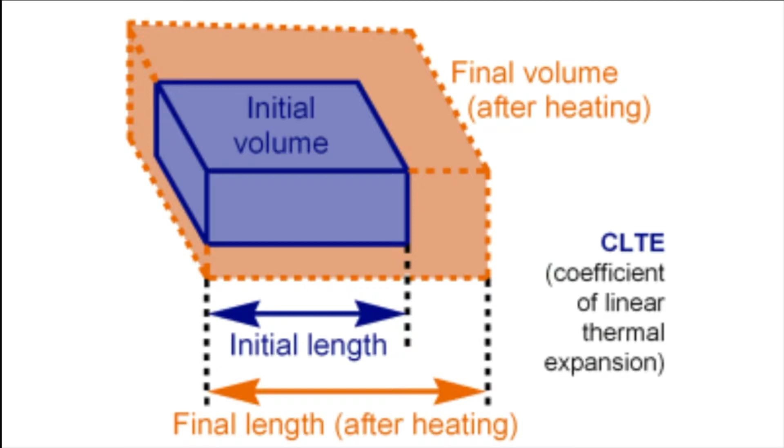When metal's temperature changes, the volume of the metal will change proportionally due to thermal expansion. In designs for the Hyperloop, it is stated that the tube will be made out of steel. Using the equation change in length over initial length equals the expansion coefficient multiplied by the change in temperature, I can calculate the amount the tube will expand. With algebra, I can manipulate the equation to be this. The expansion coefficient for steel is 13.7 times 10 to the negative sixth.

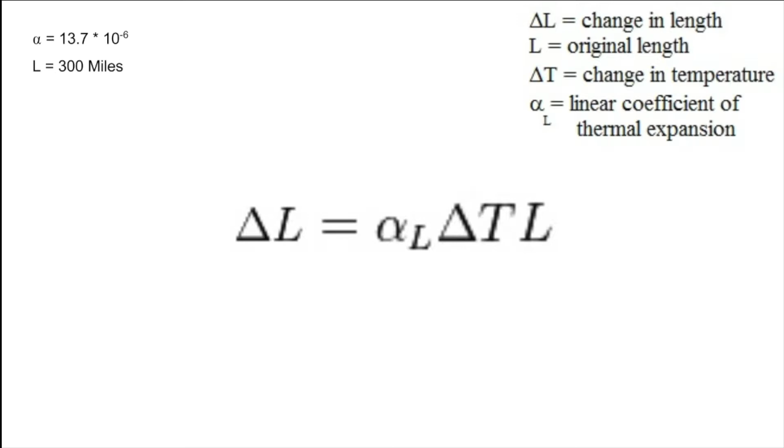300 miles will be used for the length, as that is the approximate distance between San Francisco and Los Angeles, and the change of 10 degrees Celsius will be used. With these numbers, the length expanded is 0.041 miles, or 216 feet. It is stated that the Hyperloop will have frequent expansion joints to counteract this. However, this brings up the question of how.

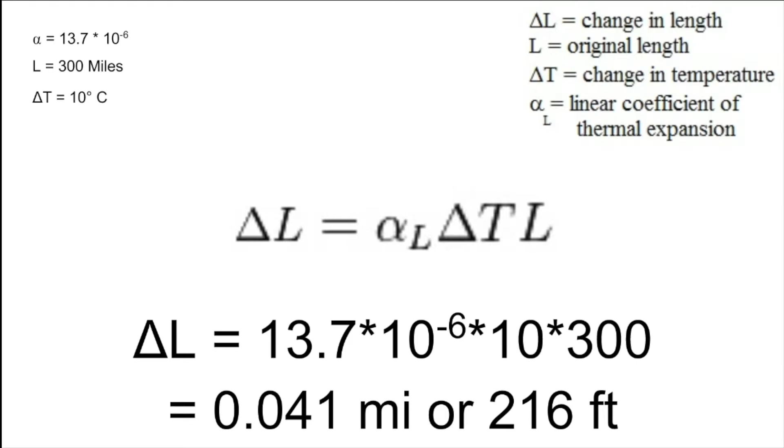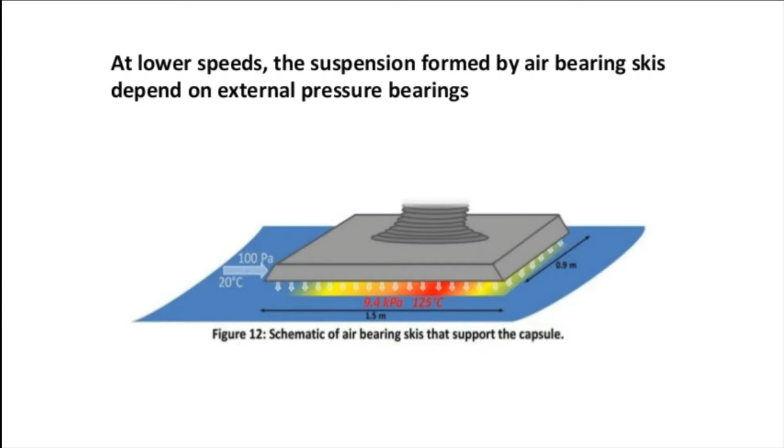Hyperloop companies have set a speed of 600 to 700 miles per hour as their target speed for pod travel. To get these lightning fast speeds, pods will need to accelerate a considerable amount. During Hyperloop tests, capsules have been clocked at being able to accelerate from 0 to 100 in less than a second. While this is an amazing feat, it is also very dangerous for humans. The human body is technically able to safely travel at any speed, no matter how fast. However, the problem is not the top speed, but getting to that speed.

To give you a sense of how much a G is, commercial airline G-forces hit 2 Gs at max, and the drag race world record is 4.2 Gs. Companies are shooting for a G-force of 0.5, substantially lower than 4.5, which is what tests are currently. Companies again and again state that safety is their number one priority. However, they are yet to explain how they will reduce G-forces. All that they state is that it will be safe before launching the product.

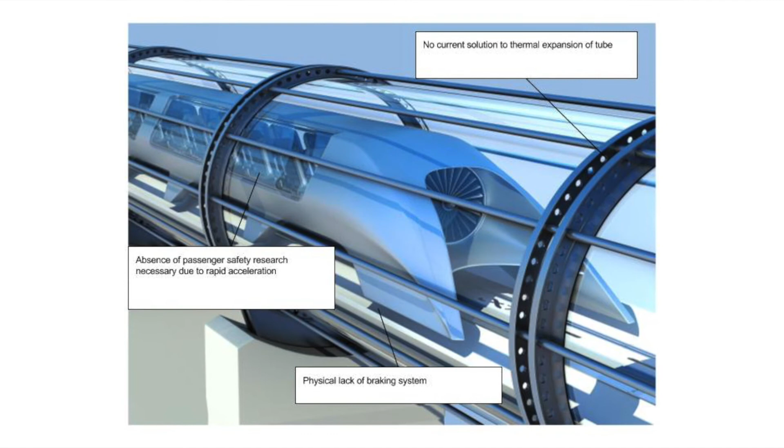The Hyperloop is great for transporting cargo right now, but it is very unsafe for humans. Until more research has been done, the Hyperloop is unfeasible because it is unsafe for humans. The three discussed problems, lack of braking system, lack of acceleration safety, and thermal expansion, individually are fixable, but represent a deeper problem of underdeveloped technology in the Hyperloop.